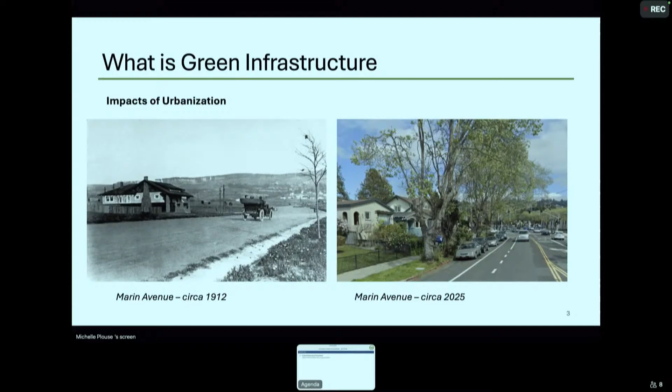You can compare that with a somewhat current view taken from Google Street View in 2025, showing just how the city has developed over the 100+ years. On the left side, you can see just a single house structure with a roof - the street is unpaved, a lot of open grassy area. Compared with the right side, where we have a full street curb to curb, a lot more houses that are obscured by some of the tree and foliage, and just much more dense and impervious surface built up in the city over that last 100 years.

Next slide, please. So what happens is when you're developing in any area, you take an area that has a lot of capacity for infiltration of stormwater during rain events. And as it goes through this progression of development, you introduce a lot more impervious surfaces - surfaces where rainwater will hit it and just pool right off and find its way into the nearest drain or waterway, with much less capacity for infiltration. So you'll generate much more intense flows in much shorter periods of time.

What green infrastructure does, the concept is that it helps restore some of the features of a more natural pre-development runoff. It'll slow that intensity period, and help reduce the transport of pollutants generated from an urban environment. For example, if you have a roadway, you have cars that may drip oils or other fluids, deposited particulates from brake dust, etc. This gets transported into the storm drain system and discharged into creeks and the bay. So putting green infrastructure in place helps to mitigate that effect, and gives an avenue - some green infrastructure - to allow for recharge of the groundwater system.

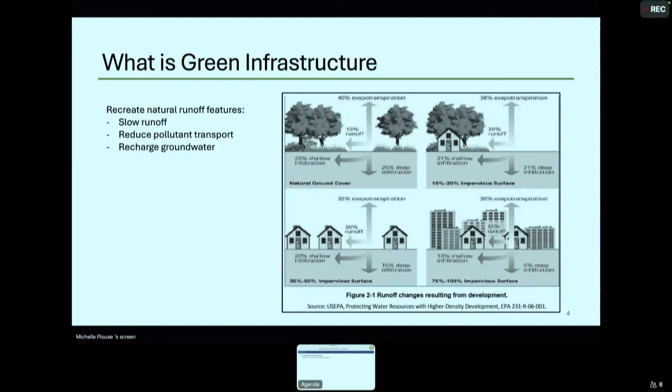So what is green infrastructure? I've got some examples here.

Could you go forward a slide? I wonder if it's missing some photos. Yeah, we'll just throw them all up there.

And then the bottom three, if you could go forward one slide, are other examples found elsewhere.

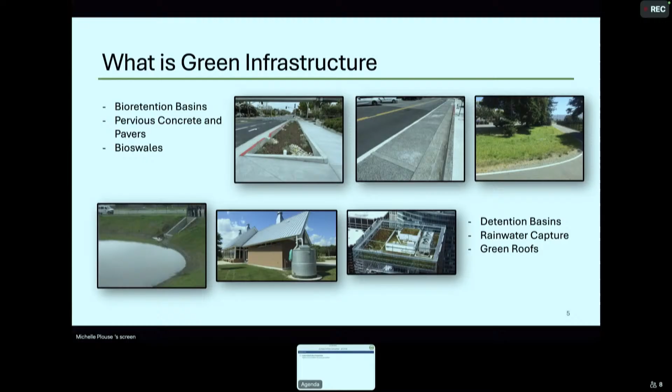There are systems that capture stormwater for potential future reuse. And another example is green roofs, where you have similar vegetation or grassy areas that help absorb or infiltrate that water and use it towards naturally growing vegetation so it's not just running off. This can make use of roof space that would generally be used up just sheeting that water off.

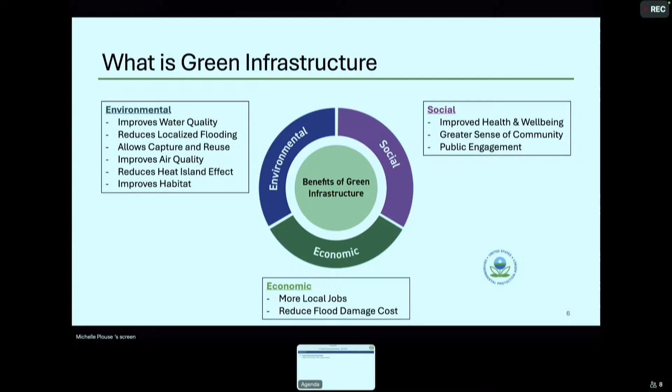So, sorry, what does MRP mean? Sure, MRP is an acronym that stands for Municipal Regional Permit.

Generally speaking, it refers to the regional stormwater general permit that affects many of the cities in the San Francisco Bay Area.

Really, we go back to 2009, which is the first iteration, when the Water Board, the regulatory agency that protects water quality in the Bay Area, issued this stormwater permit affecting many municipalities. Even from that early time in 2009, they recognized the benefits we just talked about from implementing green infrastructure.

But it wasn't really until the second iteration was adopted in 2015 that it took off. They adopted language in that second version of the permit requiring cities to start thinking about how they were going to implement green infrastructure within their cities, making that a formal requirement. Part of what they required was for cities to put together a framework for identifying opportunities to install green infrastructure and help prioritize how those would get implemented.

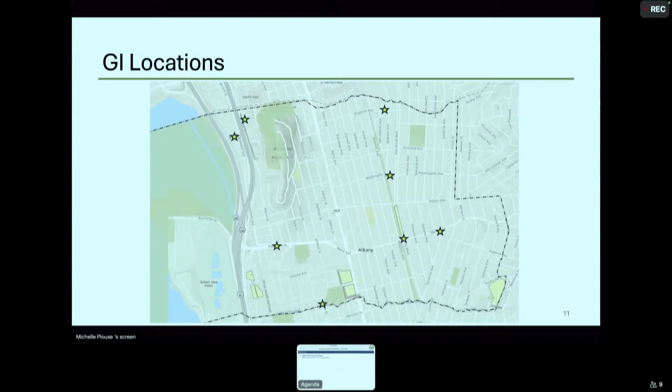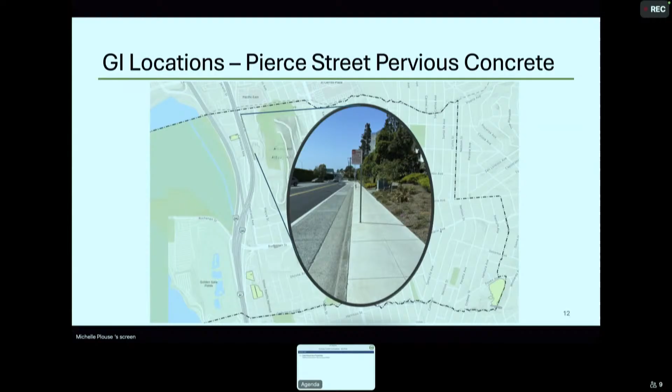So I added a map showing the different locations where GI is already implemented, and I'll quickly run through them. The first implemented, or constructed in 2012 as part of repaving of Pierce Street, we added pervious concrete in the parking strip, and that helps infiltrate some of the flow running along from the impervious roadway.

Also in 2012, this is the Marin Avenue and Santa Fe Rain Garden. We installed these bulb-outs to shorten crossings as part of Safe Streets. This is one example where we implemented a green space, a rain garden, to help infiltrate some of the local drainage.

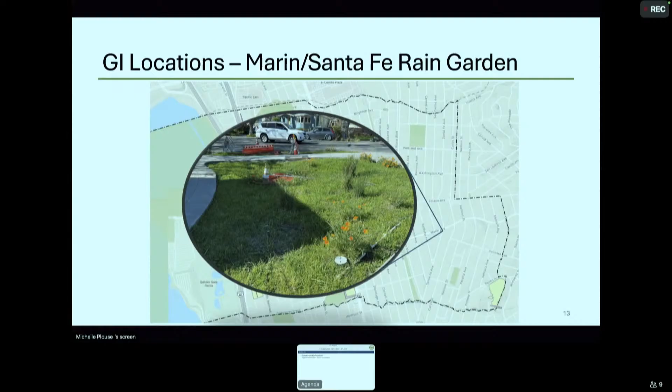We have the Buchanan Bikeway. When we installed that in front of USDA, we had some additional public space between the Bikeway and Buchanan Street, near the intersection with Pierce Street. So we installed a bioswale there to help infiltrate some additional water before the runoff reaches that storm drain inlet.

Jumping ahead to 2017, this is part of a collaborative project with the school district where we installed a rain garden at Albany Middle School, which receives runoff drainage from Brighton Avenue and infiltrates it in the rain garden on Albany Middle School premises.

This is the Public Works Building, the construction of which finished in 2017. There we incorporated two bioretention basins that take drainage from the impervious parking lot and outdoor storage areas.

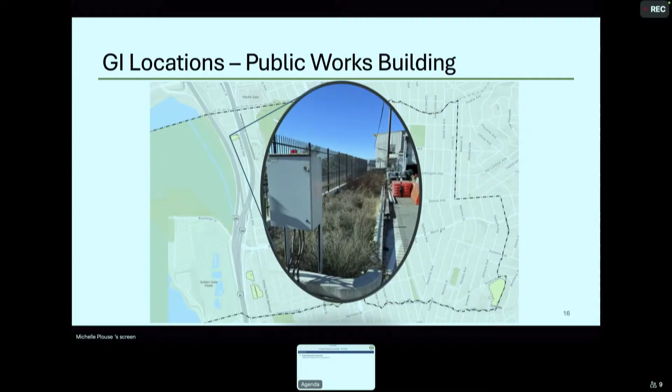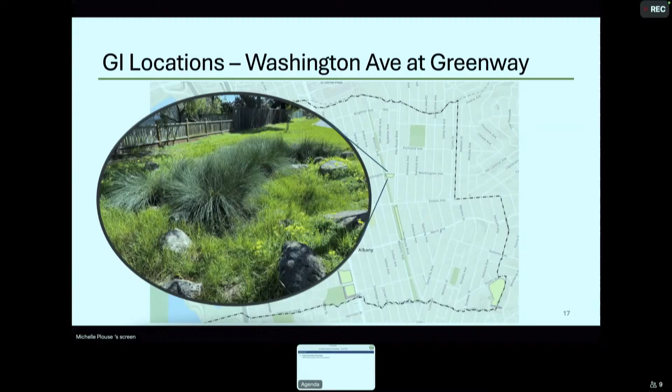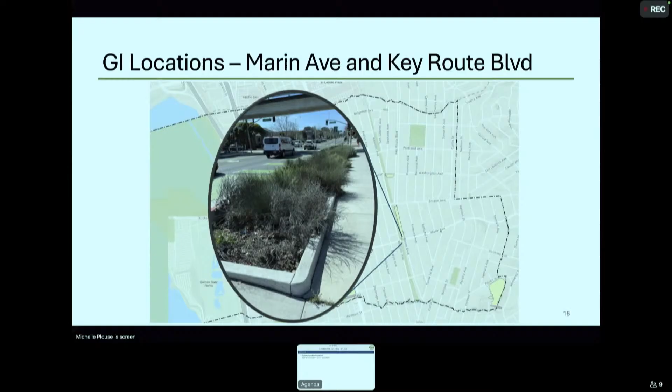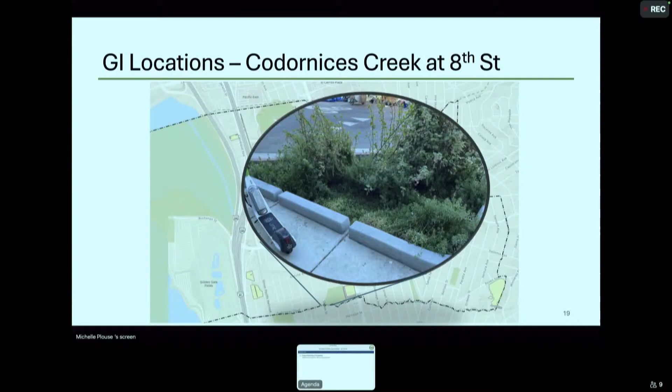And finally, we have Codornices Creek and 8th Street, where there's a pair of bioretention basins taking flow from the street at 8th Street and a portion of the parking area on UC property. So that helps illustrate some of the projects we've already implemented over the years.

Now I want to switch gears and talk a little bit about maintenance. We've installed all of these great projects, but over time they'll age, the plants will get older, they'll dry, they'll die off, even with the best of maintenance. So we have to find a way to systematically manage and maintain these green infrastructures that we spend a lot of time and resources investing in, so they can operate at their best. The city does have an asset management plan.

It follows a very general practice of identifying what assets we have in the city, doing some inspections so we can keep abreast of how the condition is, how they're functioning, how they're operating. We can assess based on those observations and put that together into a plan, then implement appropriate measures based on what we're seeing. So that's generally what we talk about in an asset management plan, to help categorize those assets and apply the appropriate maintenance treatments to them.

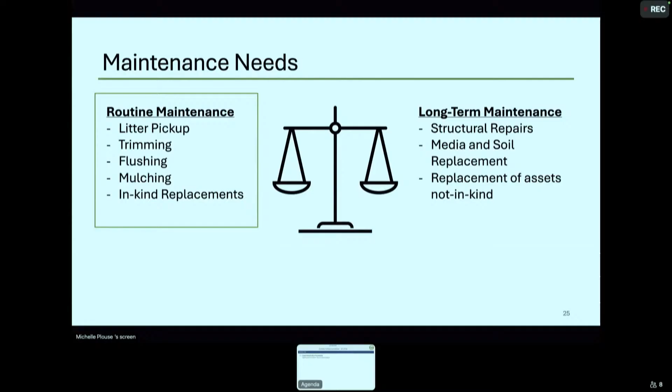So that was just showing that we've done our inspections, we've done our assessments, and we're trying to plan how we're going to systematically approach the maintenance we need, both routine and long-term.

This is where we are working on a collaboration with the Watershed Project and Ethan's group to look at how we can systematically approach our GI maintenance requirements. They have really great experience working with other cities and can lend their expertise to the City of Albany in both routine and long-term style maintenance.

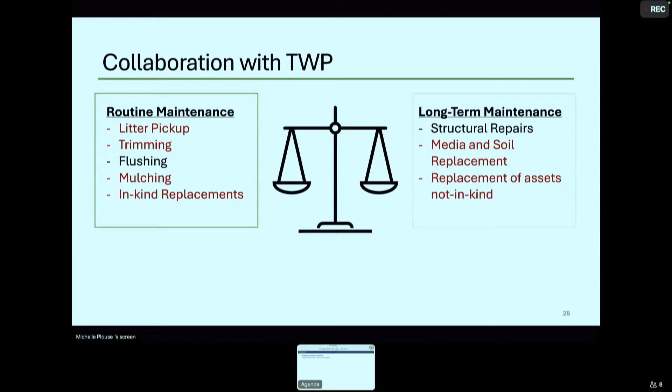One thing we're really working on looking forward is to address some of the long-term maintenance needs. We want to start organizing a community-oriented event that people can get involved in and help improve these great resources in their communities.

A lot of the original native plants have gone away, and it's been taken over by grass. What we'd like to do is remove some of the non-native plants and refresh it back closer to its original state, refresh the soil infiltrative media so we can retain that infiltrative capacity, and restore the mulch. We think this is a great opportunity for the community to get involved and get their hands dirty, doing some of the soil and mulch additions and planting even.

We're really excited to try to kick off something like this, and hoping for a successful project where we can also expand this to some of the other GI we have installed that are also aging and in need of this larger refresh.

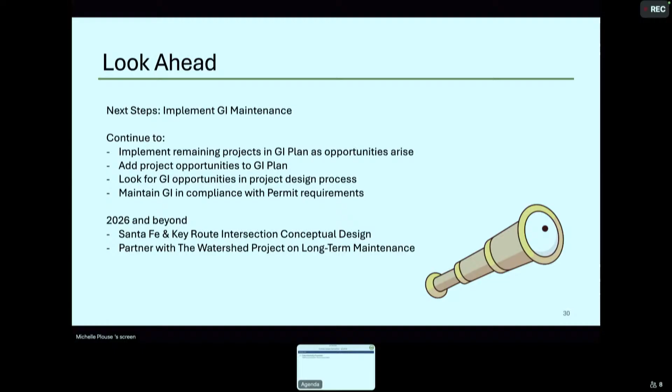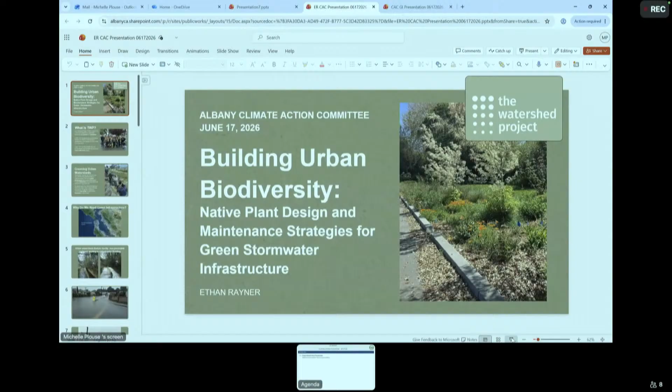Next slide. So here I'll introduce Ethan and invite him to come up here. He's prepared a couple of slides too to talk a little bit about their background and some of the great work that they've done in the past, and I think some general benefits of GI as well. I think we'll just continue right through with Ethan's presentation and then take questions afterwards. That's all right with you? All right.

Sorry, I'm just having some trouble with this PowerPoint. Let's see if I can.

Good evening, everyone. So while we're getting that set up, I'll start by introducing myself. My name is Ethan Rayner. I work with the Watershed Project. We are a local environmental nonprofit based out of Richmond, California. And this year, actually, we are celebrating our 30th anniversary, so we've been around for quite some time. The first couple slides kind of talk about our background, but I can dive right into that.

Education is the through line of our work, environmental education. We've worked with the City of Albany before, every coastal cleanup day over at the Albany Bulb, always very successful and a great event. So we do trash collection, all sorts of things, educational events. My own department is greening urban watersheds, so that's kind of the bread and butter of our work here, and also why I'm here to present to you today.

I could also just talk off the cuff if that would be useful. Sorry, I've almost got it. Just a second.

We already kind of mentioned other forms of GI, but bioswales, we really like that term. Sometimes they can be termed bioretention areas or other terms, but we really like to emphasize the bio of it, bringing in plants as well to help be a natural solution to flooding, slowing, spreading, and sinking stormwater over time. You can see a bunch of pictures off to the far side of the screen as well that David mentioned.

The landscape previously was all oak trees and open savanna and all sorts of great stuff. Now, in the past 50 years, it became a gray funnel where water just flows from our streets, carrying all sorts of pollutants like microplastics and all sorts of crap. It goes into our storm drains and then directly into the bay.

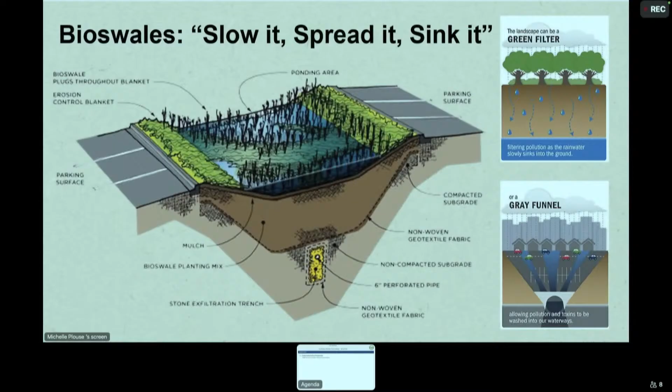That is kind of the beauty of the bioswale. It captures all of that, uses its roots and the mycorrhizal fungi network underground to sequester it, and eventually break it down over a longer duration time scale.

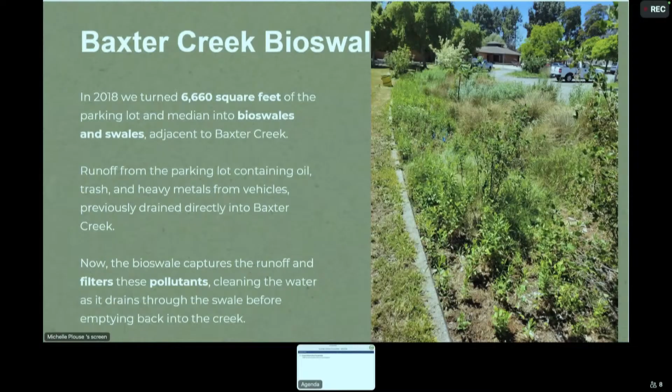And so here's a conceptual design of the area. You can see the adjacent creek zone and the way the water flows as well into that bioswale.

It's all natural. One thing I like to say about bioswale, depending on the audience I'm speaking to, is how effective it is over time. It can last decades, depending on the carrying capacity of the soil. There are no filters, no energy that goes into it. It's all energy neutral. Sometimes the plants may need to be replaced, we'll cover that in a second. But I want to emphasize this is a green solution that does not require energy, tech, or filters. It's just plants and soil medium.

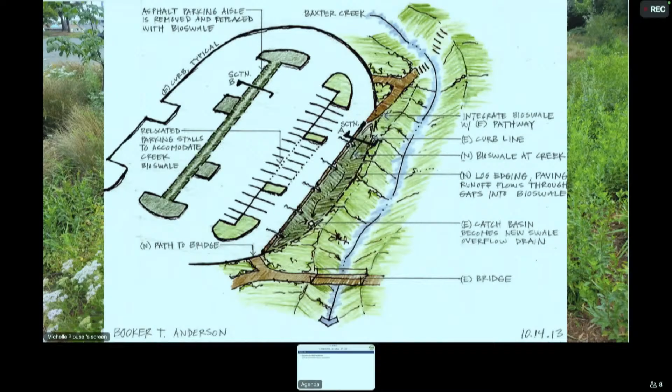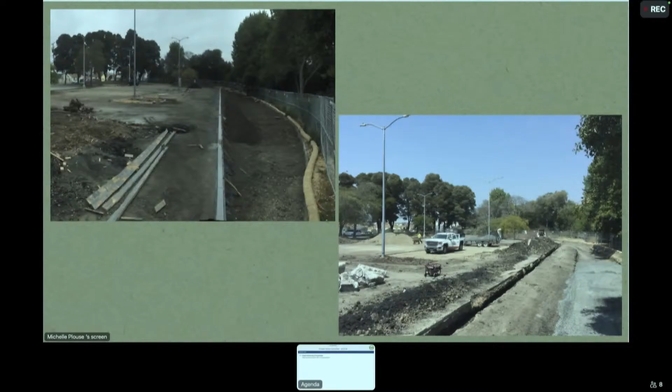Next slide please. So here's some pictures of construction. I don't think we need to dwell too much on this. This is relatively standard, but you can see it being constructed. The bioswale key components is the layers of soil, soil types. In the bottom corner you can also see gravel, which helps filter out things as it settles and percolates through the system.

The Juncus, the gray rush, has grown much wider, but we ran into a significant maintenance challenge. So how was the City of Richmond equipped to deal with that? How were other partners equipped to deal with that? The limited plant palette was certainly a compelling factor in this. It did not include other diverse palettes of spreading plants other than Juncus patens. You can see there that it's hardy, but it's just being mowed down.

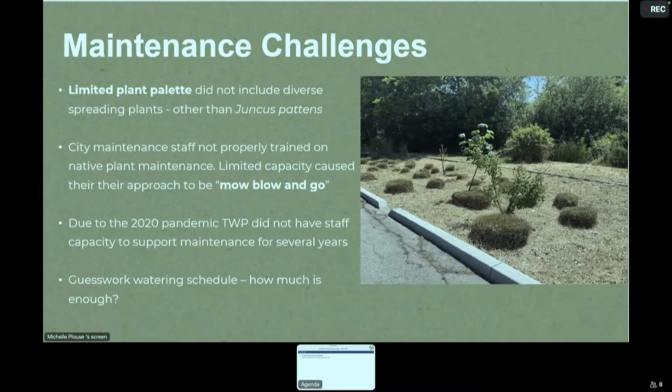So next slide please. And so here are some results, and the next slide emphasizes this as well. So after it's mowed, it's green and weedy in winter, it's empty by late summer, there's significant attrition of other shrubs in place, and there's not really any significant blooming season - only early spring when all the other weeds pop up.

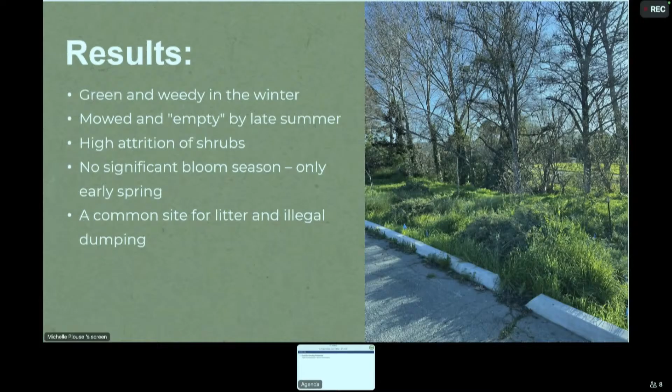So how do we change that? Next slide please - I guess we're not there yet. So the attrition, kind of the same story - a lot of these things have suffered other than the gray rush.

There were 60 gray rush installed, 40 were left. There was significant attrition on a lot of other native shrubs, including pink flowering currants, coyote brush, coffeeberry, etc. And that led to that ugly, hay-ish, weedy look.

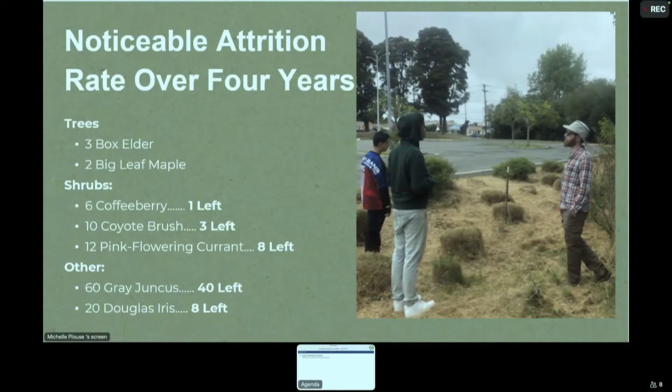Now we're talking about how our role has evolved since 2023. We took over site management of this site through an agreement with the city. The City of Richmond has a really excellent Adopt a Spot program, and they also support community groups and individuals by having Love Your Block events that have targeted micro grants for community organizations like ours, or residents and community partners, or even neighbors who want to adopt a spot.

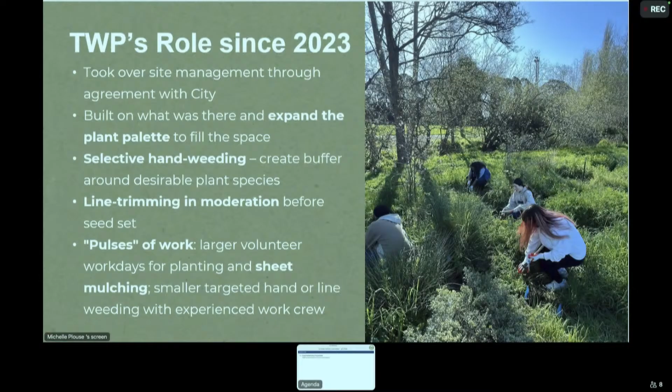What we did there was expand upon the plant palette, specifically using native plants adapted to this space to fill it out. Then selective hand weeding to create a buffer around these desired plant species, line trimming in moderation before seeds went to seed, and using pulses of work—larger volunteer work days and community events to educate community groups and individuals on the importance of spaces like these, along with smaller targeted events with our team or youth interns who really get the fine-tooth weeding done. Our current revitalized plant list includes entirely native plants.

There are still a few non-native introduced Mediterranean plants in the bioswale that we haven't taken out because they've done okay. But our emphasis is native plants, specifically ones that flower and produce seeds readily throughout the year, provide habitat, and are fast spreading—able to produce via rhizomes or seeds. They can be a combination of drought tolerant and moisture tolerant, which is essential since these spaces are usually dry most of the year and then get flooded during the rainy season. We also use a diverse mix of shrubs and other plants—herbs, grasses, forbs, a bunch of stuff.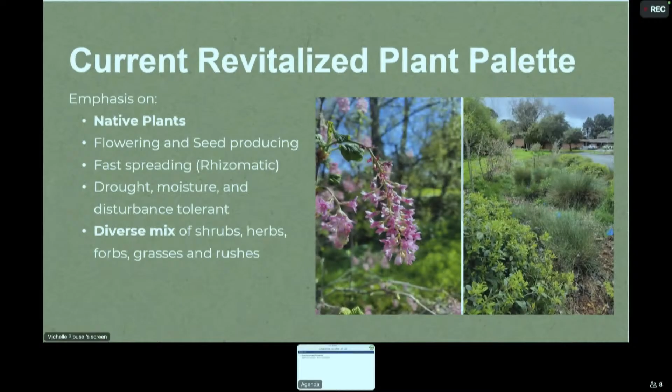A forb is kind of like an herbaceous herb, essentially. In this example, mugwort is a good one—I'm thinking of cat mint or mints specifically, something non-woody. Those are good examples, but I can provide an updated list as well. Could talk about plants all day.

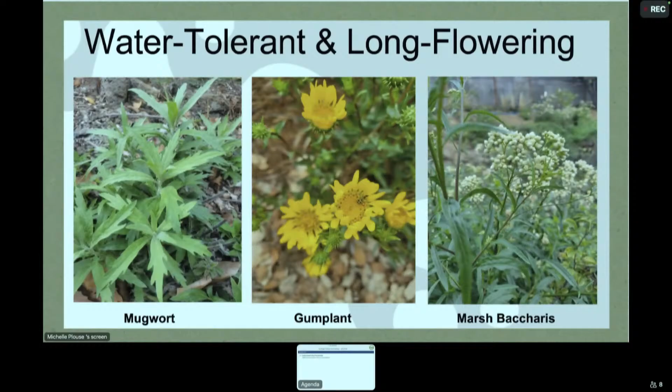Water tolerant and long flowering plants matter too. We talked about the social, environmental, and economic reasons for bioswales, but also if plants are flowering year round, the community gets drawn in—it's not just something that blooms once and is done. It provides community interest but also habitat. People like to see hummingbirds, and we've seen garter snakes and salamanders in our bioswale as well. Here are a couple of examples.

Drought-tolerant flowers are also essential. California fuchsia is used extensively in these sites—it blooms from now through the end of the year, it's quite stunning, and hummingbirds love it. Also yarrow and Pacific aster. Yarrow smells excellent, a great addition to any habitat garden.

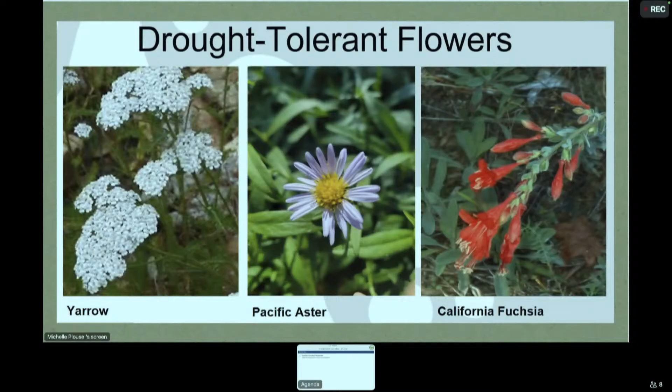We're also incorporating shade-tolerant things, both flowers and grasses, and some nice shrubs. Iris is a great example, along with alum root and California fescue.

We also include riparian plants. Gray rush certainly has a place here, but it should not be the only plant used in bioswales—it shouldn't make up 80% of the plants, more like 5 or 10%. It's very hardy, so if there are issues of access, dumping, or people cutting through the area to reach a different path, it can be used there. But there are also other rushes and sedges, many of which are locally native to the East Bay Hills and California natives as well.

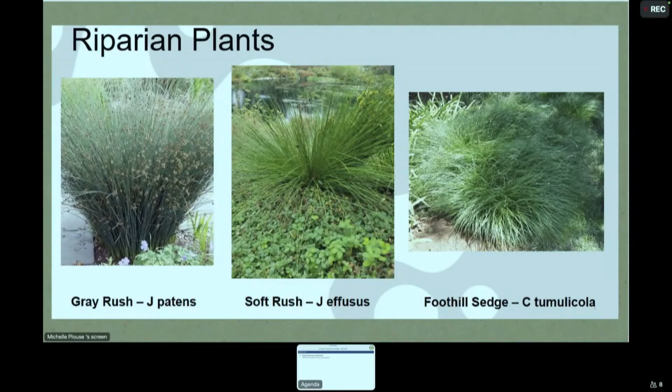And then, of course, shrubs—we mentioned coffeeberry, coyote brush, and pink flowering currant. All excellent examples that create nesting habitat for birds and songbirds, as well as pollinator habitat.

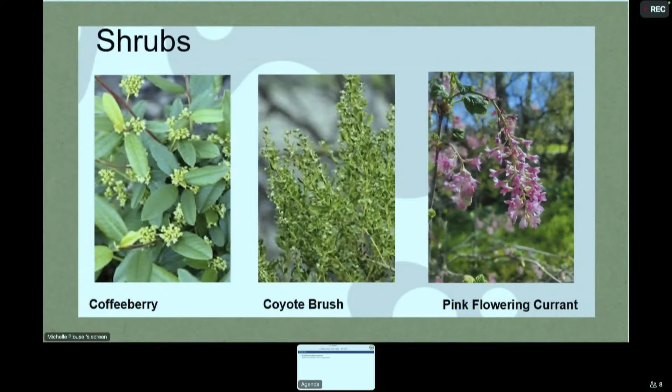So this is the same site today compared to what it was. You can see how it's spaced out with the application of mulch. There's poppies blooming in the front right by that bioswale sign, as well as some variegated maples, adding a bit of diversity of height and also tree and shrub diversity. This is what it looks like today, much improved from what it was. There's still a place for rush in here, but also a place for a diversity of other species as well.

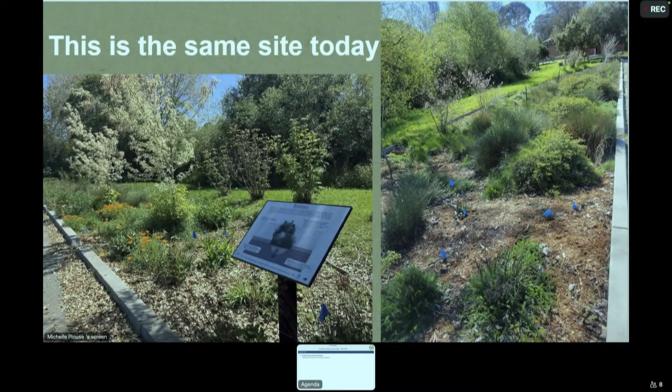So now to lessons learned and takeaways. Bioswales and other green infrastructure help create sponge cities that lessen flooding, but they can also protect creeks and benefit the local habitat as well. It's not one or the other. If you install a diversity of plant species, you can have the best of both worlds, especially with flowering plants that fill in over time with benefits.

Mulch also makes maintenance easier. We could talk about mulch all day. Sometimes it can clog bioswale features, but it's essential to limit weed spread. Hand weeding, instead of the mow, blow, and go approach, is also vital, especially in the first few years before our shrubs and other plants get to a reasonable size.

I'm not sure what that last item is, let me check my notes. It's about summer irrigation, yes. Thank you. Summer irrigation is key as well, quite important even during the post-establishment phase after two or three years.

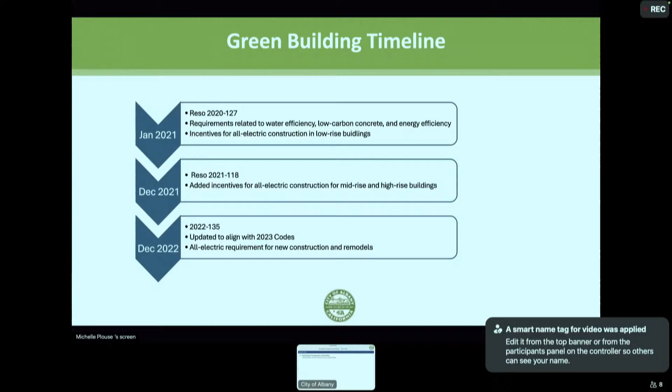Now, in 2019, there was a lawsuit that the California Restaurant Association filed against Berkeley over their natural gas ban. This was an ordinance Berkeley passed that was similar, but a little different from our rules — it basically made it illegal to install natural gas piping in new buildings. That lawsuit went through the courts for several years. Finally, in 2023, the Ninth Circuit Court of Appeals struck down Berkeley's ordinance, saying it was preempted by a federal rule called EPCA, meaning you're not allowed to do this as a city.

And then in January of 2024, they declined to hear Berkeley's appeal. At that point, we basically considered the case closed and stopped enforcing the all-electric section of our most recent resolution, 2022-135.

Question: does SF have a similar ordinance, and do they still enforce it? Yes, San Francisco has a more recent ordinance requiring all-electric construction — I'll get into this in more detail later. It's a little different from Berkeley's, and more recent. But basically, looking at the language of the ruling, it was determined that our resolution was probably also in violation of EPCA, so we stopped enforcing that back in early 2024.

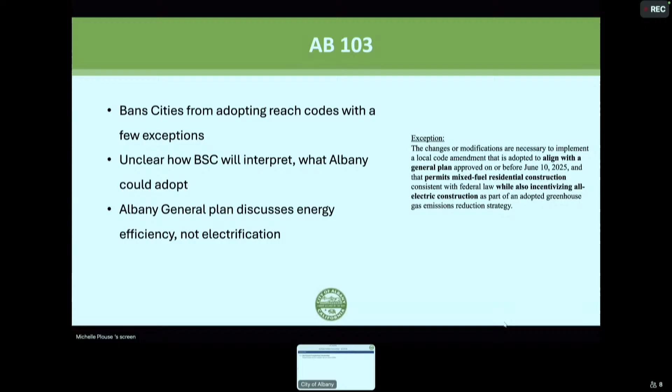Anecdotally, from other cities that are trying to pass REACH codes, what I've heard is that nobody really seems to know, and maybe the BSC is still kind of figuring it out too. There's definitely a wait in terms of actually getting anything approved and through the door. So this is all to say there's a really big question mark here of whether we even legally can pass a REACH code, and if we can, what exactly that would be allowed to include, and how many loops and retries we might have to go through. Really not certain right now.

Now, putting that aside, just thinking about what's even possible outside of the BSC approval process: one of the other big limits to REACH codes is that anything energy related has to be cost effective. What does that mean, cost effective? Well, it means that the California Energy Commission has scientists that do these really big analyses, cost and energy analyses of various types, and they produce numbers that say, okay, you can require X, Y, and Z, or you can require a compliance margin of 4.5 if you're in this climate. There's all these kind of technical pieces of it.

There's essentially limits placed on how much we can require. We can't require that all new construction be electric, but we could do a similar thing where we say if you want gas in your new building, then you have to be 6% more efficient than an all-electric building. It would incentivize electrification, make it a little easier, and make the cost of putting gas in a new building more expensive.

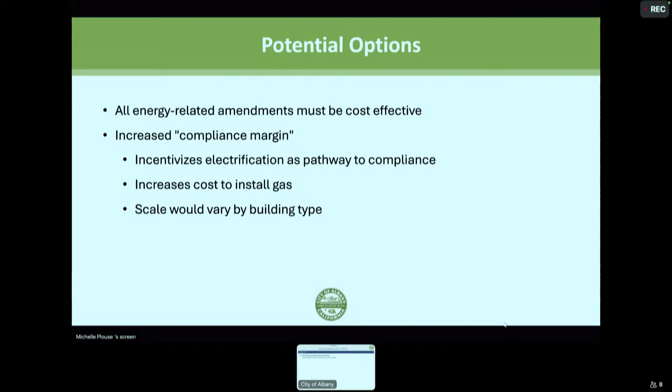There's also potentially some other types of green building measures, things related to water efficiency or other little pieces like that. A lot of that stuff the state code has now gone up to where we were before, so it might be something new, or no longer relevant, but there might be a few bits and bobs.

Now the scale of impact of all this is also a really important thing to think about. How much of an impact would it make for us to try to pass a REACH code? As I mentioned, the state building codes being stronger is great, but it also means our impact from a REACH code is smaller, because there's less of a gap there.

In terms of the numbers, we do not get a lot of new buildings here in Albany, as I'm sure you're aware. There's not even really space for that. Really the vast majority of our new buildings are ADUs, going in people's yards or attached to their home, maybe converting a garage, that sort of thing. That counts as a new building if it's detached at least. We had 13 of those last year.

I think 2 of them were single-family homes and 11 were ADUs, something like that—almost entirely electric. And I think among that whole pool there was 1 gas water heater and no gas furnaces. So the numbers are very good, again, not a huge gap to fill.

If we're looking at major remodels, our most recent resolution did have an all-electric requirement for major remodels. In terms of the cost effectiveness we'd have to do to incentivize it, it's not totally clear how much we could require, but assuming we could do something there, maybe 10 to 15 of those a year, depending on how you define it.